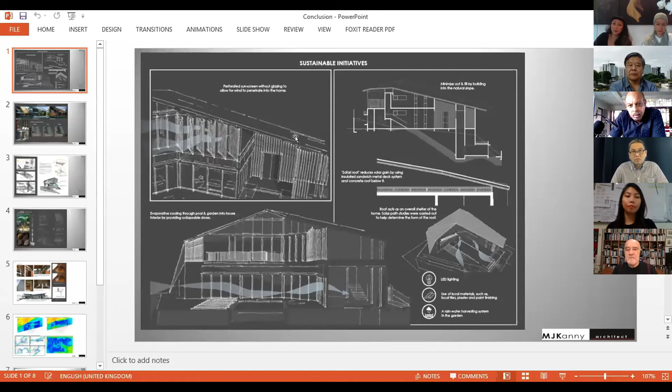I just want to talk a little bit about the things I didn't talk about, the things that clients don't normally see, the stuff that architects do in the background, but it's really fundamental, especially with creating tropical houses. The studies and sketches that we need to do initially to see how cross ventilation works with the house. And this is an example of the boomerang house that we just completed.

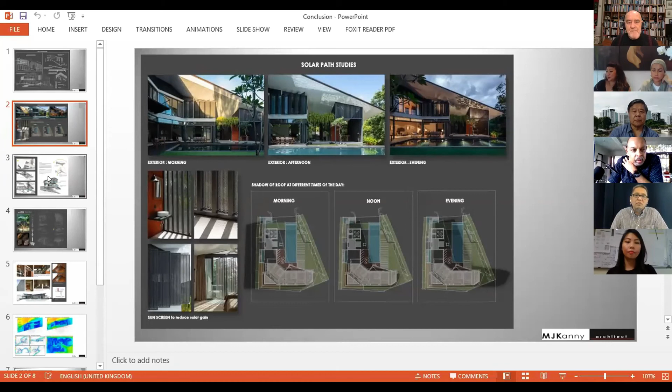The roof was very prominent and had a job of keeping the sun out of the open areas. So we did studies from morning, afternoon, and evening. And when the house was completed, we actually took pictures to see how it worked, and it worked exactly as we figured. So if we didn't do the initial studies, you might find that your design intent may not work. So these are very important aspects that we as architects look into.

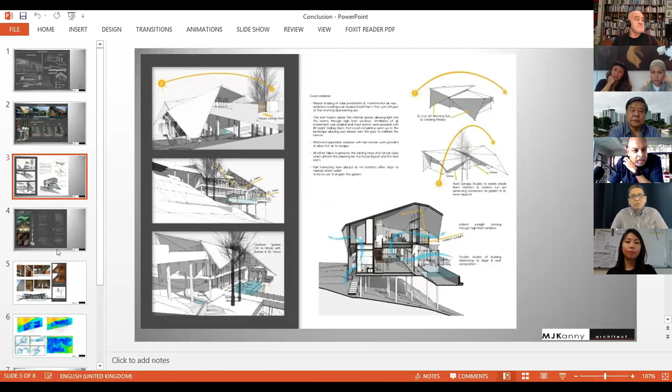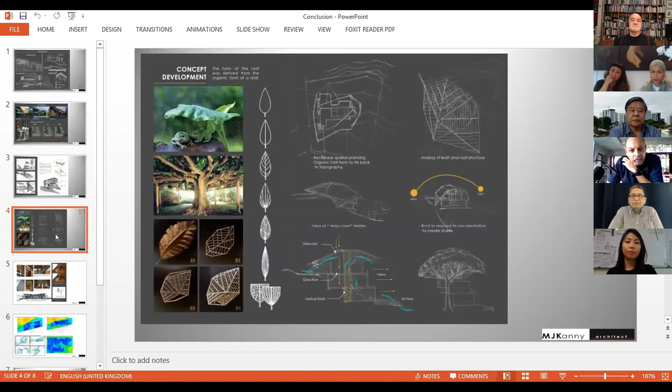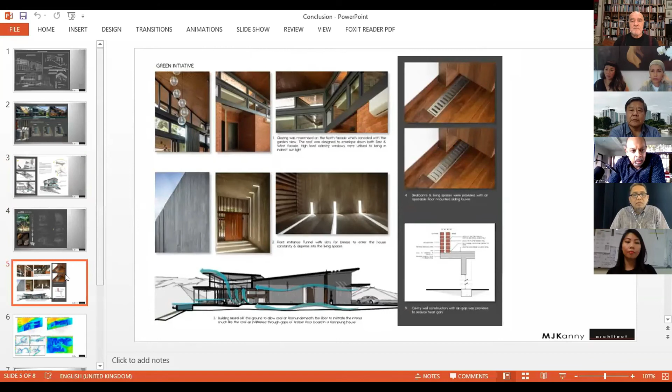In my own house, Kampung Tunku house, we did wind velocity and thermodynamic studies of how the wind comes into the house and how it exits, just to make sure that cross ventilation is working and you had enough airspeed to keep the house cool.

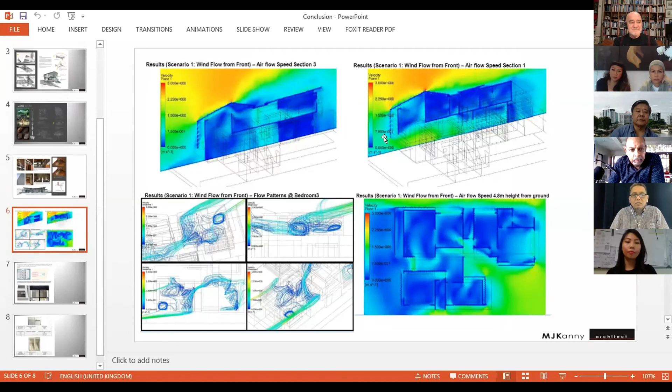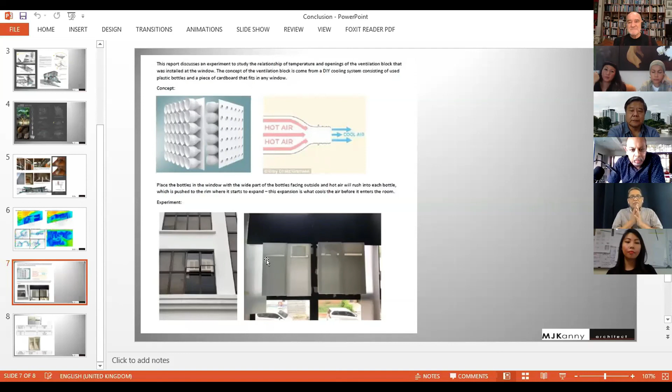A project that we were working on recently, we were looking at the idea of having bottles put in your windows. This is something done in Bangladesh to keep the rooms cool. And we are developing vent blocks that imitate this. We built models and fixed them in our office windows, and we did tests to see how the slots in the vent affected the temperature and the wind speed.

So these are just some examples of what we do in all our projects. And I think by doing this, we can invent newer ways of doing things that were done before, but in a different way.